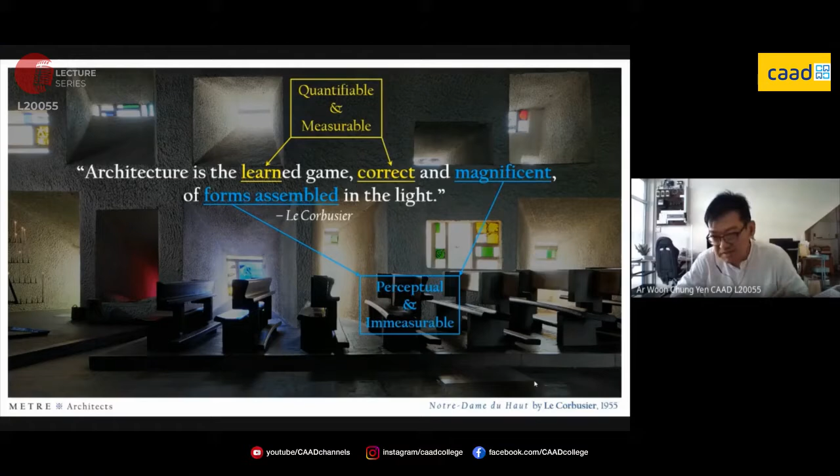I would like to talk about the perceptual in architecture. What do we mean by that? A first impression of this building would likely be that this building looks like almost 90% art and maybe only 10% science. That might be a first impression because it is so artistic, so expressive. You've not seen anything like this before.

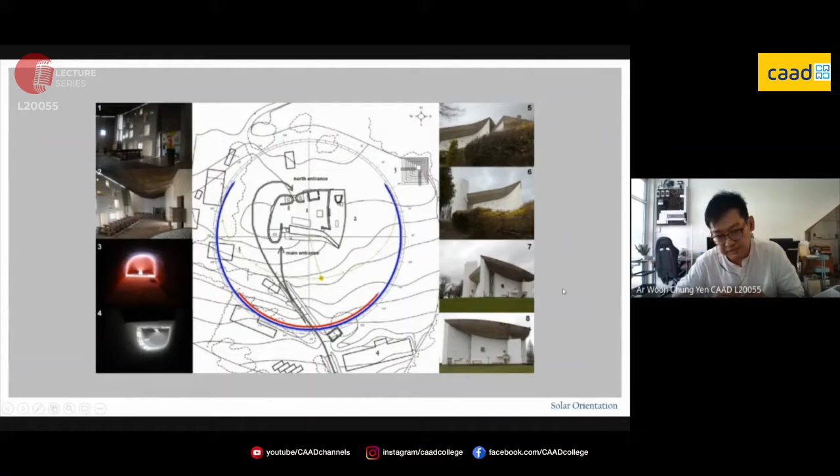But of course, Corbusier would have satisfied all that is measurable and quantifiable. For example, the solar orientation. You see the east and west facades less than that of the north and south, and this building orientates to the sun angle from the south. The roof form that we perceive to be so sculptural is actually very precise in blocking the high angle summer sun and allowing heat to enter from the low angle winter sun.

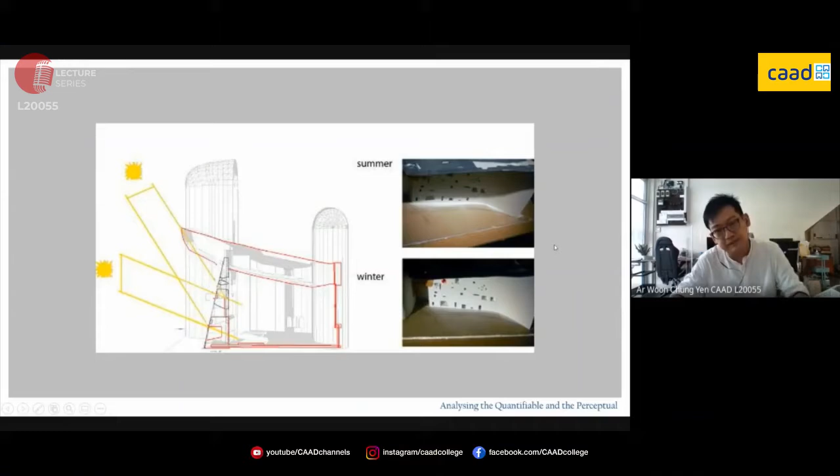For quantifiable aspects of architecture, we can analyze them like this with clarity. But how do we analyze the perceptual qualities of architecture?

I remember seeing images of this building as a first-year architecture student, and I was most intrigued by the two concave facades. To me, they are external facades that feel interior.

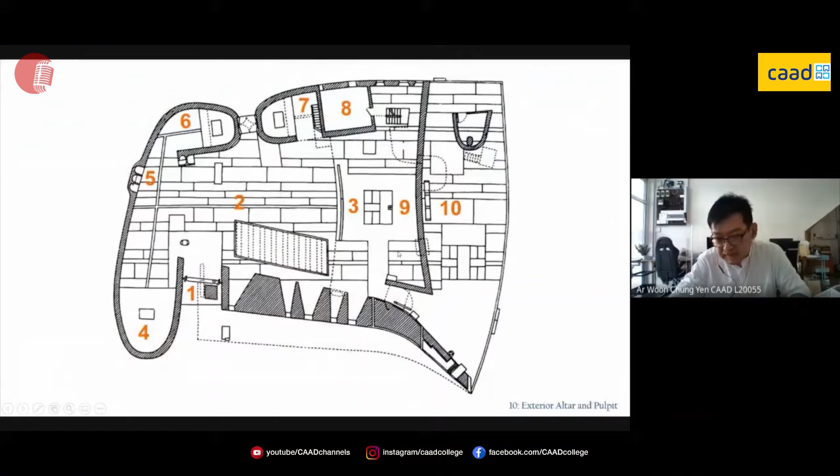The curvature on the east side is the backdrop for the exterior altar and pulpit. This curvature is also an acoustic device to project the sounds from the altar and choir onto the pilgrims gathered on the hill.

And then I realized that this exterior facade feels interior because it feels intimate. An exterior facade having the intimacy of an interior space due to its curvature, which acts like an embrace.

The difference in perception when you stand in front of a concave versus a convex wall is obvious. In front of a concave wall, you feel welcoming, you feel inviting. The curve tends to want to pull you inwards. Whereas in front of a convex wall, it feels assertive, slightly confronting, and the wall tends to push towards you.

So as a first-year architecture student, I have discovered for myself my very first perceived geometry: a concave feels intimate.

As students, we should expose ourselves to good architecture, either through images or in real life. But we should not imitate them. We should pause and think for ourselves why we like certain perceptual qualities of good architecture that we have seen, and try to extract the principles behind it.

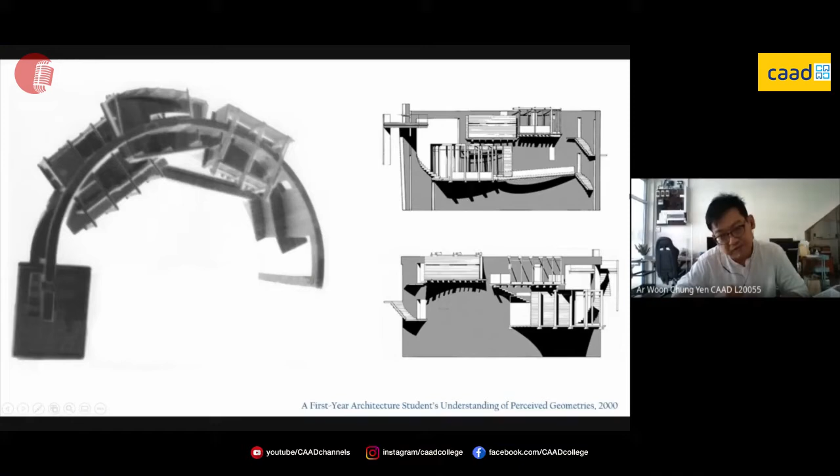Next, I would like to share 6 projects from the office, both interior and architecture, both built and yet to be built. In this very first interior that I want to show, we continue the exploration of the curved geometry.

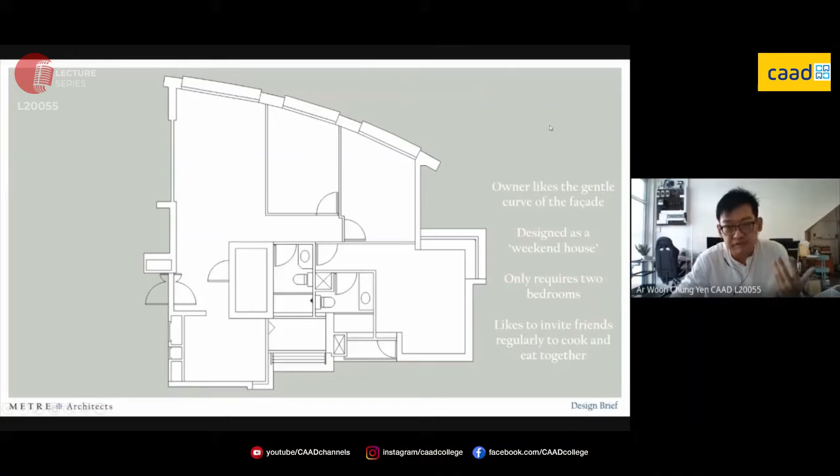This is a resale unit. The owner mentioned that she bought this unit because she likes this very gentle curve of the external facade, which is quite distinctive because apartments tend to be more rectilinear. She currently stays with her dad, so this just needs to be a so-called weekend house that only requires 2 bedrooms. So this bedroom in the front, adjacent to the living room, can be demolished to make space for a larger living area that allows her to invite friends to come and cook and have a meal together.

The first thing that we did was to demolish the bedroom beside the living area. And then we were thinking, how do we start? How do you even draw the first line of your design?

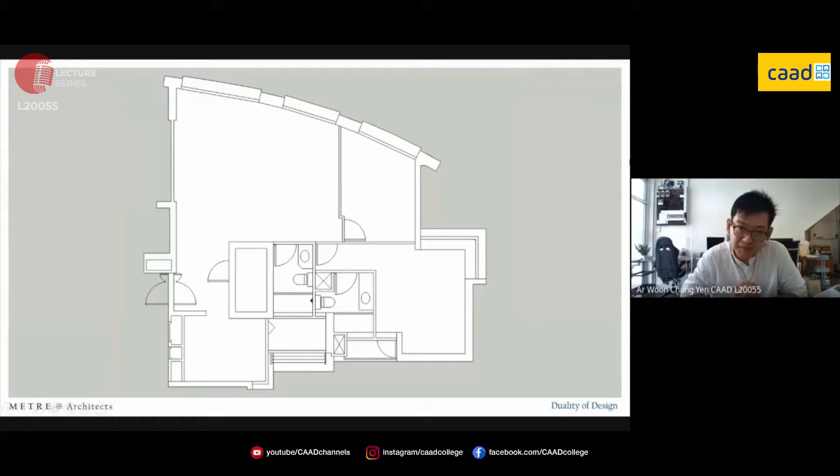So in design, there is also a duality. On one hand, you have the requirements and the preferences of the owner. On the other hand, you have your own spatial history, your own understanding of geometry. So design is actually the moment of synthesis where this duality comes together.

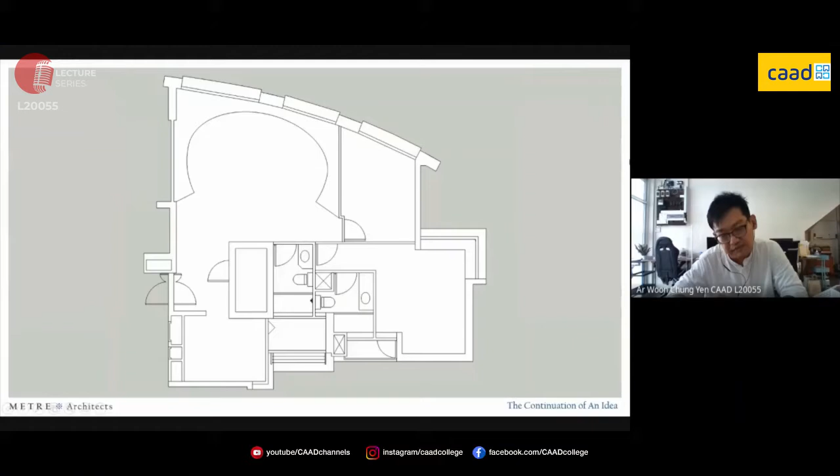You search through your spatial history and you discover one geometry able to understand the project, able to answer the project brief. And in our case, it is this curvilinear geometry, giving a sense of intimacy, as we have mentioned before, but also a very gestural gathering, and not forgetting the owner's preference for the curved geometry.

The top part of the space is made to be very airy and light with white painted color. The ground is given a very warm timber tile color. And the overall effect is that this space feels very grounded because emphasis is on the ground.

You feel the curvature of this bench around the lower parts of the body. So the moment you come into this space, you just want to sit down and relax.

We fixed the perimeter so that the central area could be very flexible. During photography, we played with the placement of furniture.

Without real people using the space, you can sense the possibility of certain pairing with certain geometry, and you see the intent or the possibility of very flexible groups of conversation during the gathering.

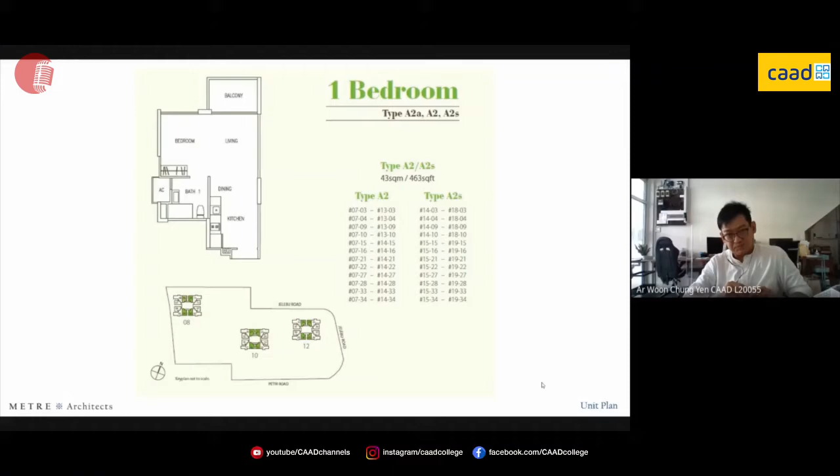The owner is a young professional, so pretty much similar brief to the earlier project. The only difference is that there is only one single space in this studio apartment. So everything has to happen within 43 square meters.

This is a new condominium. The unit already comes with certain built-in carpentry, cabinetry, built-in kitchen counter, storage, and the wardrobe.

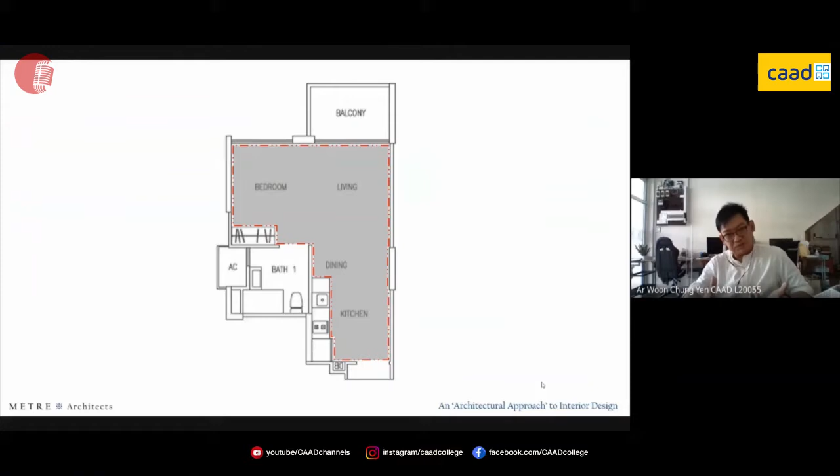As architects doing interior design, I feel that perhaps there is also a certain tendency to read the blank spaces of the interior as the project site or the project plot boundary. And your solution will be a singular building or an object within this site.

Design happens not linearly, but we try to explain design sequentially so that there's some clarity. The first intervention is the sliding glass panels here to contain the kitchen cooking smell. At the same time, we immediately create an entry vestibule so that your entry sequence could be layered. You do not step directly into the main space of the house.

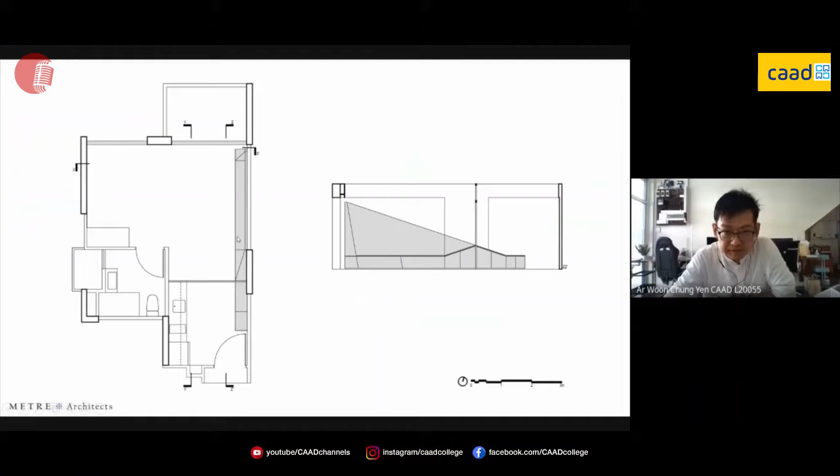On this elevation, we introduced our very first diagonal. Starting from bench height of about 450 millimeters, this is where you sit and wear your shoes. Shoe cabinet is below. From this height, we did one rising diagonal across to lead your eye to the daylight beyond the balcony. So we planted specific spatial cues for the users of the space. A diagonal is simple but very distinctive. So immediately, this space acquires a certain kind of character.

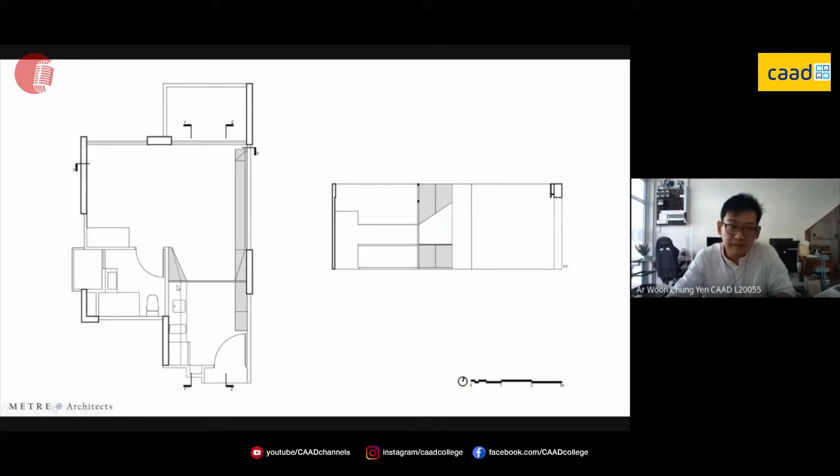Next, we introduced two more diagonals. Behind the glass sliding panel, we want to continue this kitchen counter at the back. The first diagonal is a taper because we foresee quite a lot of heavy traffic around this corner, so this diagonal makes sense more as a shortcut. The second diagonal is in the elevation of the upper story cabinetry because we want to allow more daylight to come in and land on the cooking counter. So this works as a light funnel.

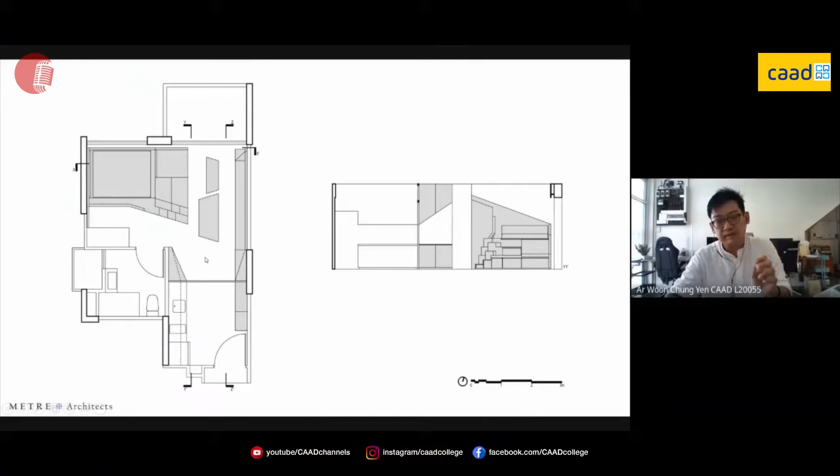In front of the built-in wardrobe, we leave the space enough for a queen-size bed, and we pinch the steps downwards slightly to better orientate the steps to the space. We like these so-called half steps very much. They were used whenever you want to save space, you want to save the overall footprint of the steps.

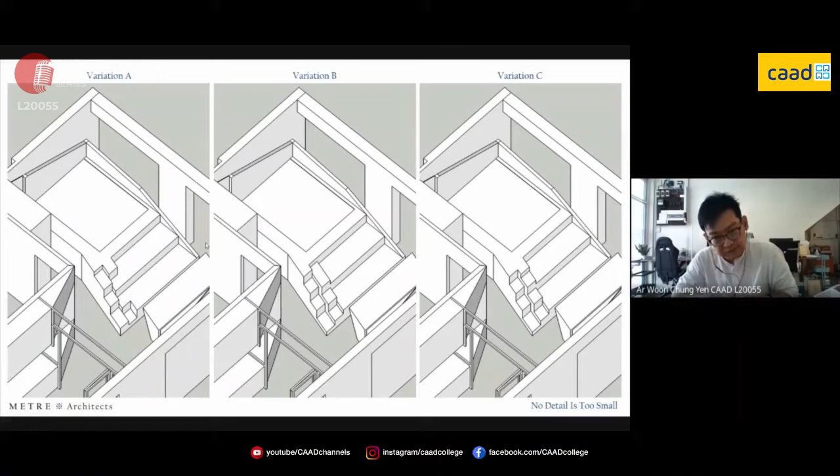Notice all the micro differences between these three options. But in design, no detail is too small. You really have to spend the effort to explore options to see for yourself which is the best geometry. We chose this geometry because it is interesting to have this winding step going up. While the steps go up vertically, this plane steps sideways from the front, and that becomes a horizontal step.

Notice in a short distance, the very light and the very dark happens together. So this is what gives the object the very sculptural quality.

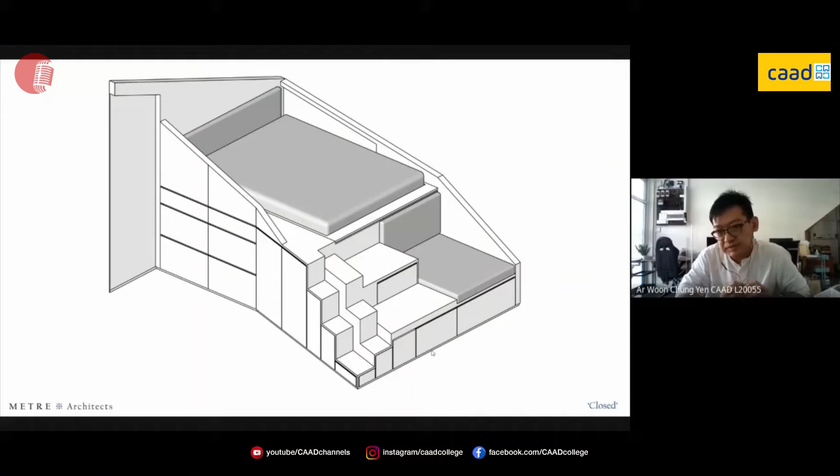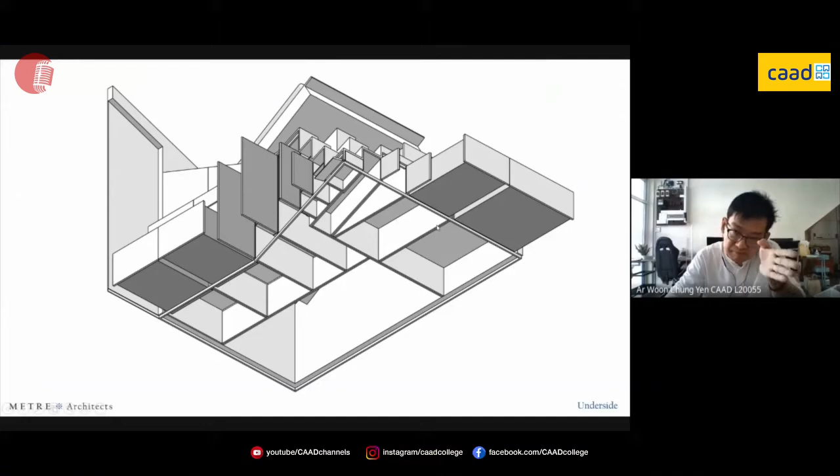We did many drawings, not for presentation, but to ensure that we communicate the drawing correctly to the contractor, because communication of design is as important as the design itself. So we literally built the entire carpentry in the virtual world, even showing the underside, how certain plywood panels, when you do them vertically, they could be like structural supports for the entire carpentry.

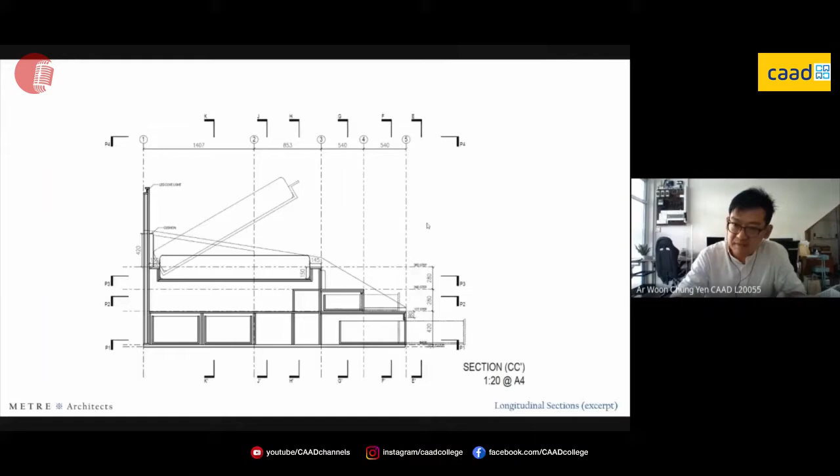We are able to get all these different angles, the key plan section and elevations, because there's so much change in the step. Basically, every new step requires a new section. So 4 sectional plans, 4 longitudinal sections, and 4 cross sections. Our efforts really paid off because the carpentry works turned out to be very accurate.

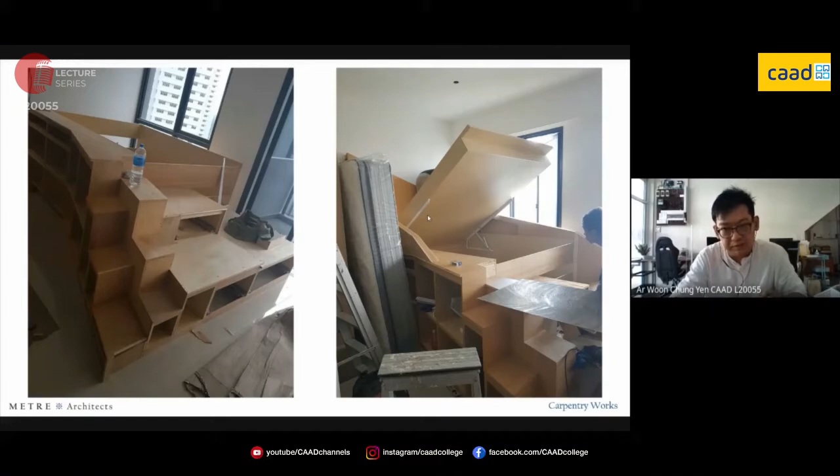We named this project Gradient Space because it is really just one diagonal. How do we perceive this diagonal? At the base, it is open. You come here to meet friends, to enjoy good company. At the top of this diagonal, the ceiling height is relatively lower, hence it feels more enclosed. You come here to relax, to rest, to be alone. So one diagonal connects two extremes of life: extroversion at the base and introversion at the top.

Not forgetting the generous volumes of storage that we have with the rise of the curve, with the rise of the gradient. We can also say that these storage volumes justify this diagonal.

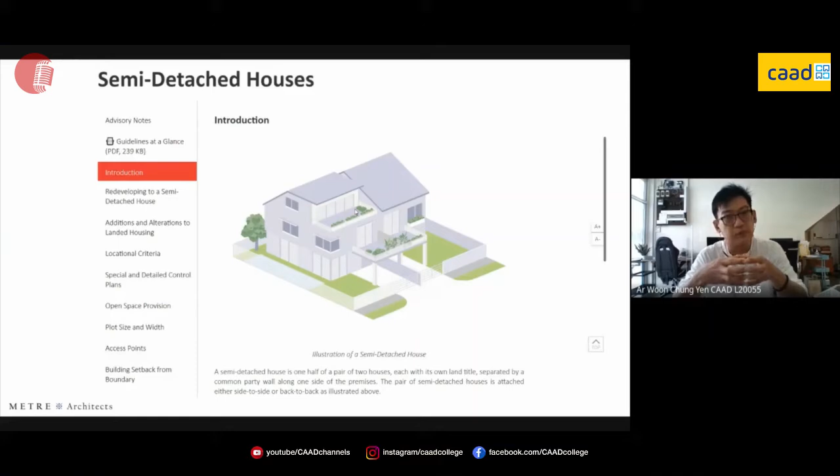Our owner's house is on the left, single story, and the neighbor had previously maximized or reconstructed the house to the maximum envelope, which is 3 stories with an attic. We shall also be reconstructing this single-story house to 3 stories, but the owner has no need for a big house because that would mean more time and effort to clean and maintain. So this is the first requirement.

The second requirement is that they are very private people. They do not like passersby on the street able to peer into their house through the gates, which apparently has happened a few times before.

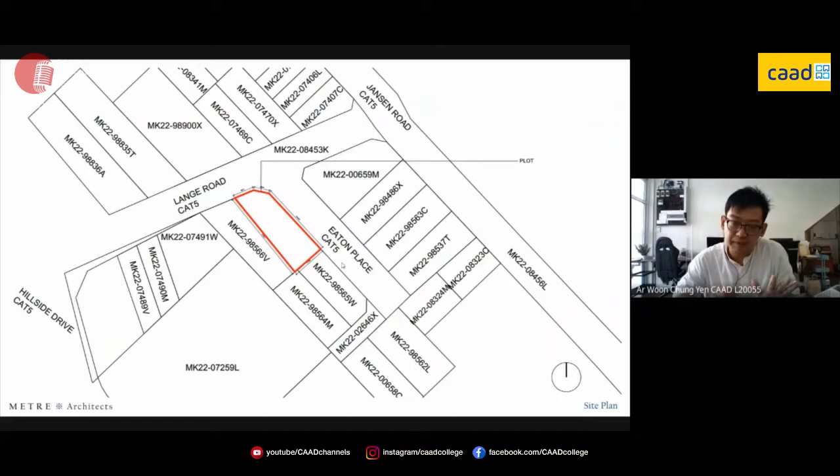The orientation of the plot is on the west side, and we are sort of shielded by the neighboring house. So we think that we just need to handle some form of minimum sun shading on the eastern facade.

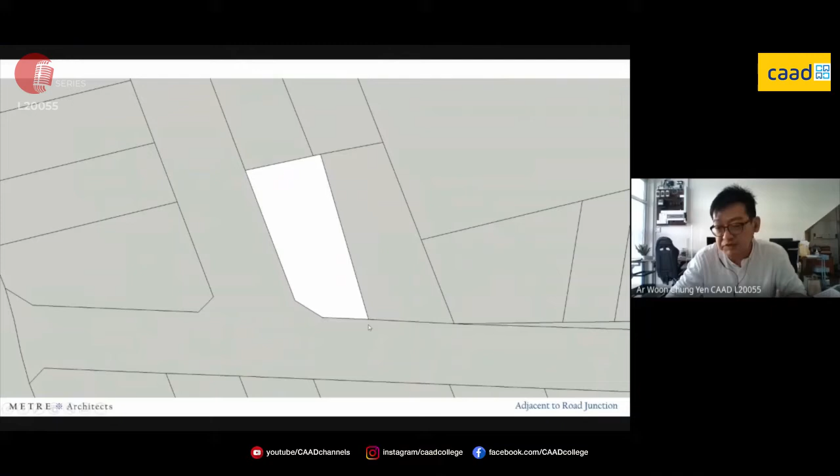If we orientate the plot to view from the T-junction, we understand why the owner wants privacy. Compared to the neighboring house, with only this frontage facing the road, our client's house has more than 50% exposed. So privacy is one key requirement for this house.

These are the setbacks, which means the house cannot be built onto the limits of the boundary. On the ground level, we maximize this setback. We have common areas of the house: the living room, the dining room, kitchen, and a guest room.

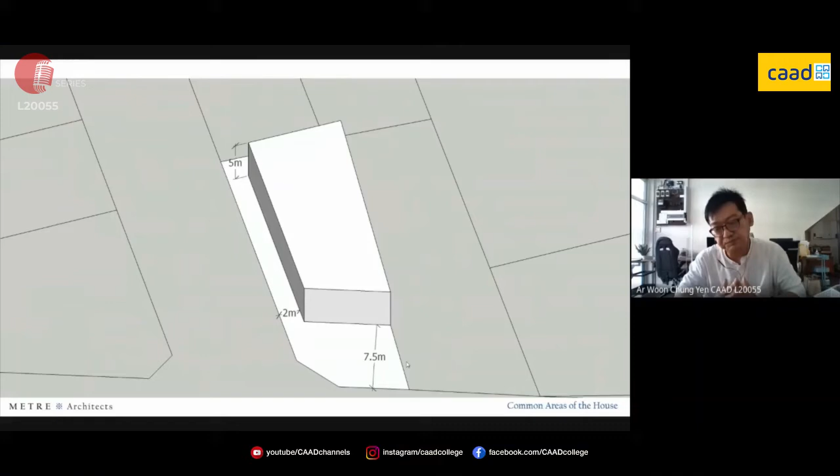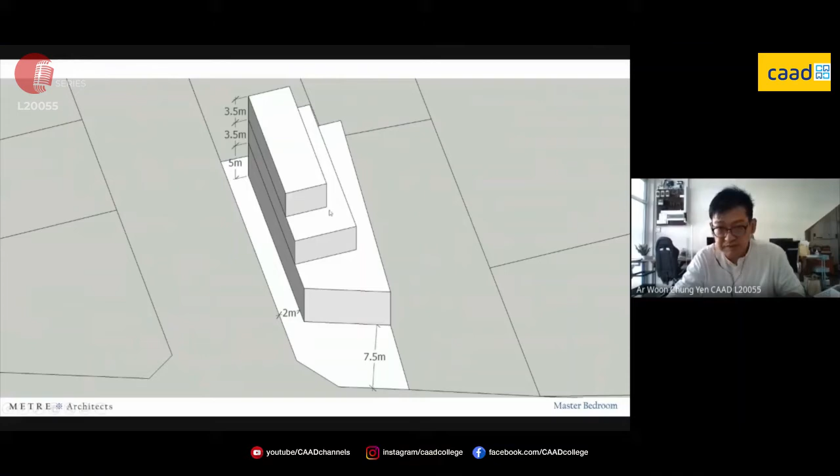On level 2, we start to pull away from the dividing wall, creating private terraces. And this area is just enough to house one bedroom each for the 3 kids. The 3rd floor is a further setback with its own terrace, just enough to have a fairly large master bedroom.

We foresee the facades that face the internal to be very porous with sliding glass panels. This is what we call an introverted house. We only want small windows on the street facade, and the porosity needed for daylight and ventilation is actually on the back.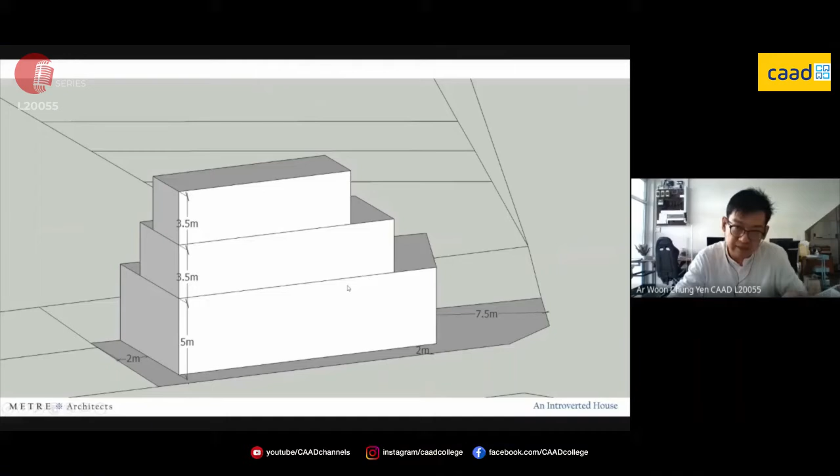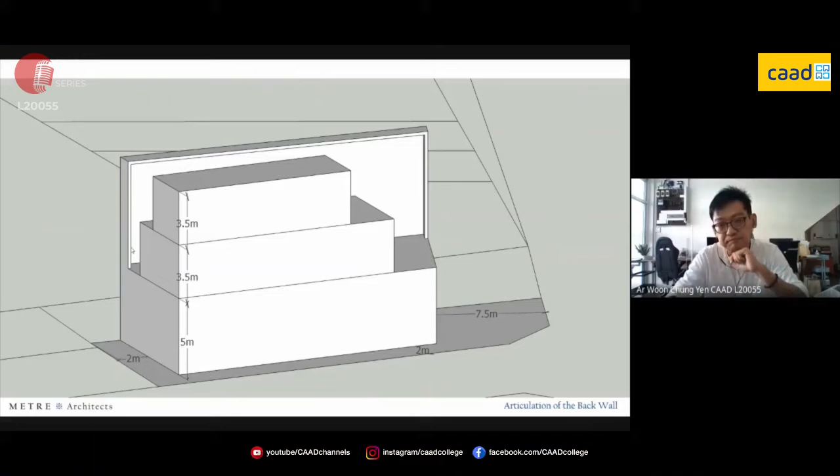We also feel the need to articulate our back wall. Notice how on 3 sides there is an extension of the fin, almost like a visor, to have more shielding and more sense of privacy for these outdoor terraces. A very simple form, but there is clarity of intent, which is private terraces that are hidden from view on the street frontage.

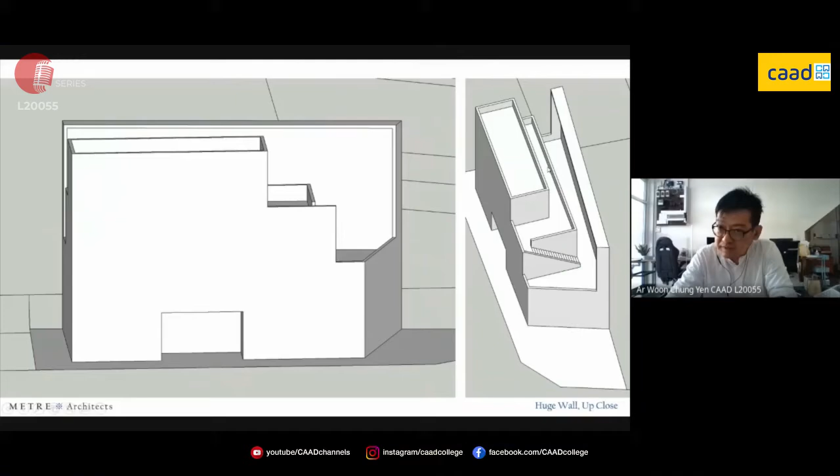This feature wall is also very important in accentuating the step profile of the house by serving as a contrast or a reference. This wall is double-story high and very close to the internal spaces, and it feels almost like looking at a painting up close, which is how Mark Rothko wants us to experience his buildings, his paintings. You are supposed to immerse yourself almost meditatively in the colors.

This feature wall is also 20 meters long, so we felt there is an opportunity to reference the sense of immensity. In nature, there is a tendency for greater concentration of lines in the middle than in the sky or on the ground. Hence our distribution of the lines follows similar logic. Not just a playful pattern, but something evocative of another experience.

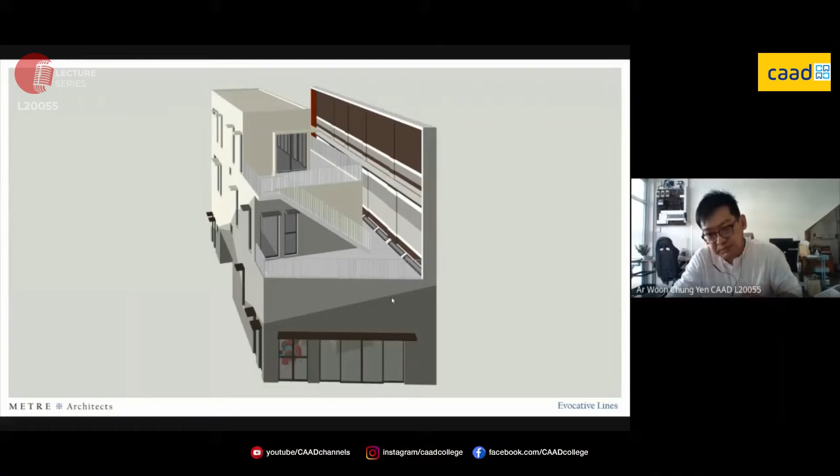We brought one line up to meet this inherent diagonal of the staircase, and we express a summit at this point, with 2 shades of cladding to relate to the stepping of the facade on the front.

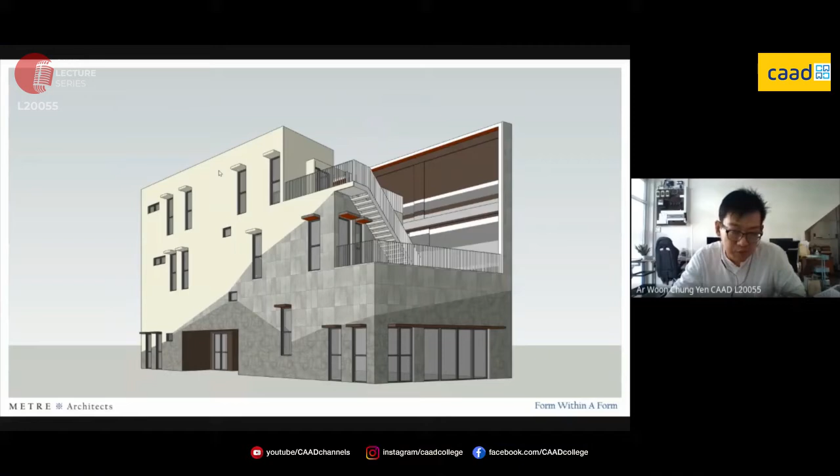Within a fairly boxy form, we have another form to break away from this boxiness, so almost like form making within the form. We know that this design has achieved intersubjectivity when the client says that it looks majestic.

These are the photos of the current state of construction. Notice this step profile in comparison to the neighbor, which is up front. Feels more private, feels more exclusive. And we can also feel the impact or the effect of this shield, making this big feature wall feel just a bit more intimate.

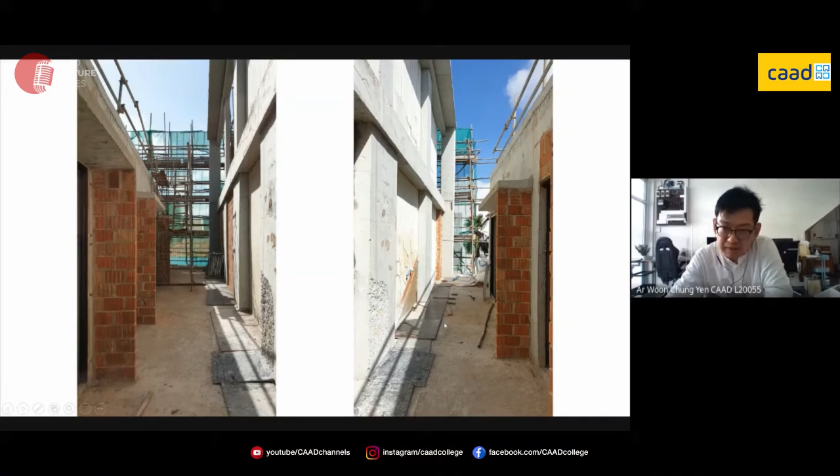This is on level 2, outside the kids' room. At certain times of the day, the entire feature wall is in the sun, and this gives another perception. You will feel as if the outdoor area gets extended to go all the way up. You feel as if the entire feature wall is part of your outdoor terrace area, so you feel a greater width of the terrace than it actually is.

This is on level 3. The moment we pull the building away from the wall, we are effectively creating what we call a here and there relationship, and the distance between them is emphasized. Again, you feel that this distance is bigger than when the same area is under an enclosure.

When the owners said that they have no need to maximize the house, they get rewarded, because these external surfaces now become receptacles of nature, and they will project light and shadow onto the interior spaces, making this experience very animated.

In this house, we explore the perceptions of distance, and hopefully before the end of the year, we get to complete this house.

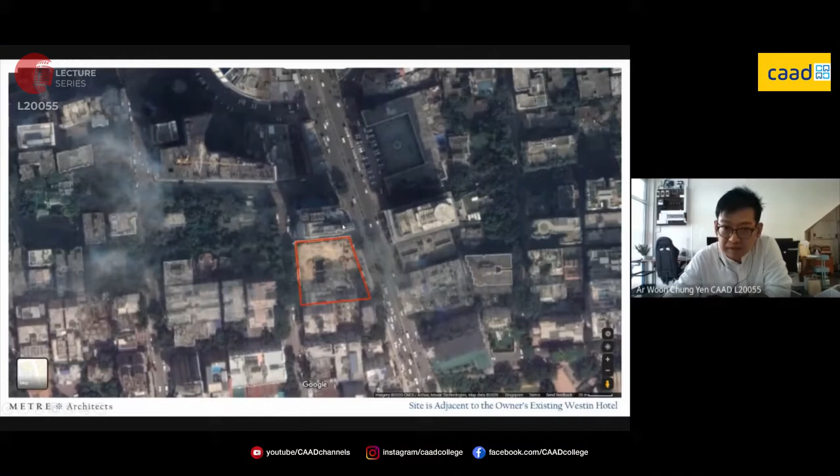For the last two projects, let's go outside Singapore. This is Gulshan area, the wealthiest neighborhood in Dhaka. The owner of the existing Westin Hotel wants to be the first in Dhaka to enter the ultra-luxury hospitality market. So on this empty plot directly to the south of Westin Hotel, he wants to build St. Regis Hotel. And of course, we are super excited to be given this opportunity to be the design architects for the project.

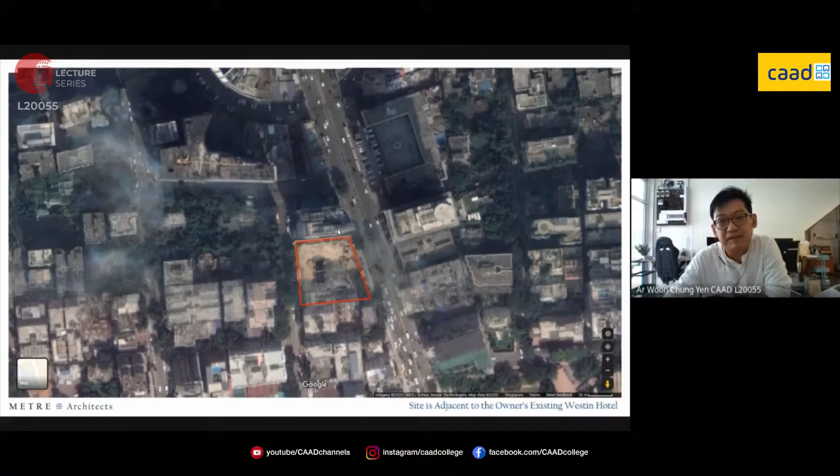If we want our design to be good, if we want our design to be received by the locals, we first have to perceive the city. I would like to show you Dhaka through my eyes as a foreigner.

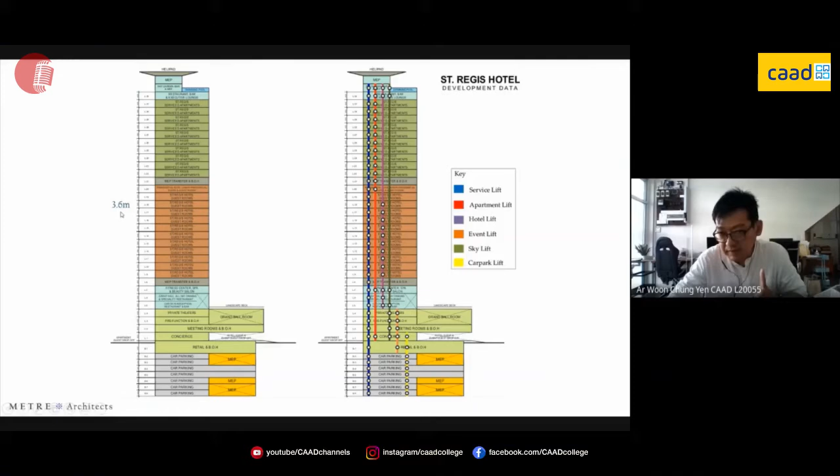Before we got appointed, the owner's in-house team, they have resources, big company, the owner's in-house team already has done the submission drawings and had gotten local approval. This is the section: common spaces at the podium, hotel in the center, and service apartments at the top. I would like you to pay attention to 3.6 meters as the floor-to-floor height. We will get back to that in a moment.

The typical hotel plan, as you can see, is already developed to a certain level of detail before we got appointed. But of course, not saying that it cannot be improved. In this plan, I would like you to pay attention to the column grid of 10.325.

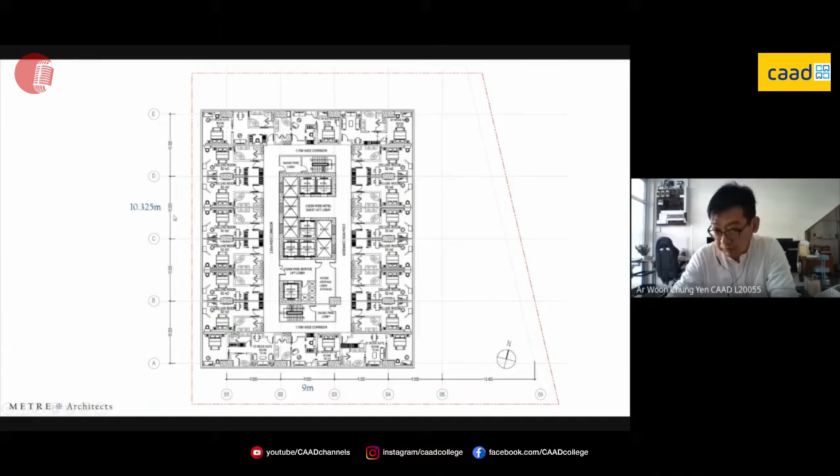Next, I want to talk about solar orientation. If your building is in nature, you could achieve the perfect solar orientation. But in an urban context, you may likely face conflicts. Existing Westin Hotel by the owner is blocking the view to the north. Buildings on the south are currently about 5 to 6 stories, but there's no guarantee - there may be a future tall development coming up if they buy over the land.

The west side is generally residential and there's lots of greenery, so that is good. And on the east, of course, we are faced with the busy Gulshan Avenue. So if you want to prioritize or maximize the view, which is what the local team did, you would have the east and west facades greater than the north and south facades, which is a direct conflict of ideal solar orientation. What this means is that we will have to have a good system of sun shading on the east and west in order to turn this into something positive.

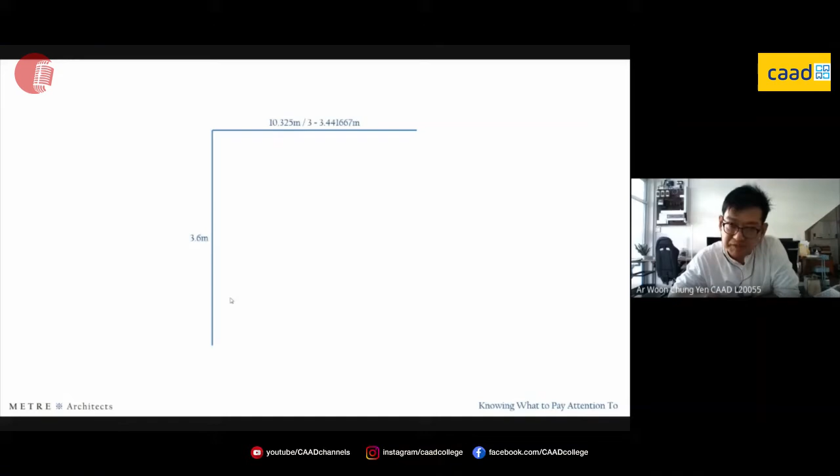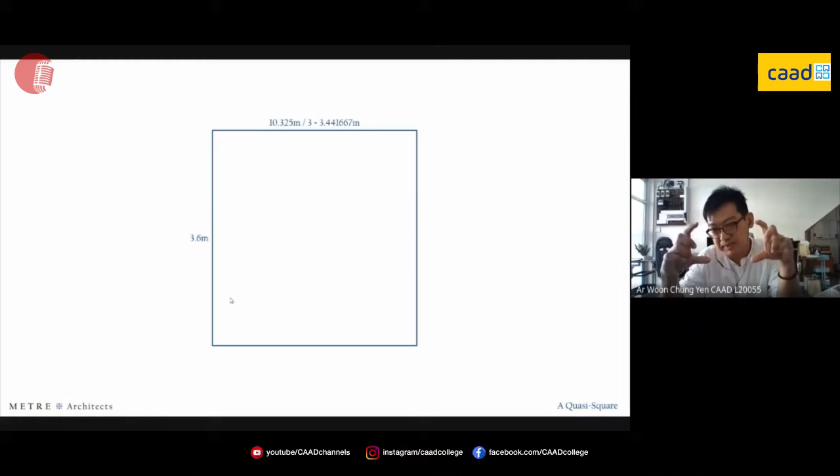Remember the 3.6 meters floor-to-floor height? We discovered that the column grid, if you divide by 3, you get something very close to 3.6 - what we call a quasi-square. Your perception may buy it, or you may perceive it as an approximated square. What this means is that now we could have a simple basic module to develop the sun shading on the east and west facades.

We have an intuition for an interplay of two simple geometries. We realize a circle may not integrate well - there may be some complex surfaces. So we did what we call a 12-sided polygon.

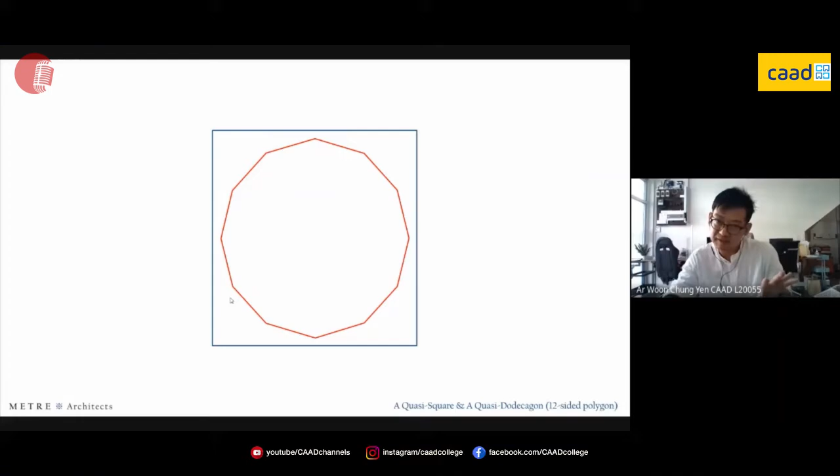Per local code, sun shading can protrude 500 mm from the facade. So imagine the blue on the building facade itself and the red 500 mm in front of the building facade. And if we join these two geometries, this is what we get.

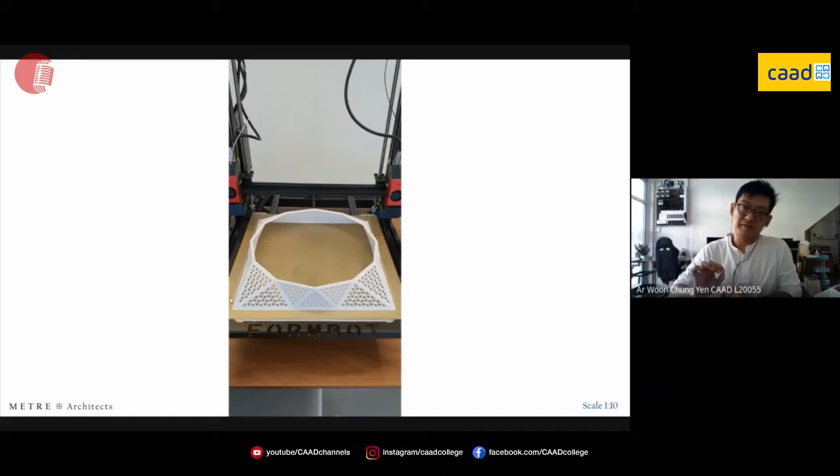At the top, the 12-sided polygon is very clearly, very pristinely expressed. At the base, we see the square. This is 1:10 scale, so the entire model is 5 cm high.

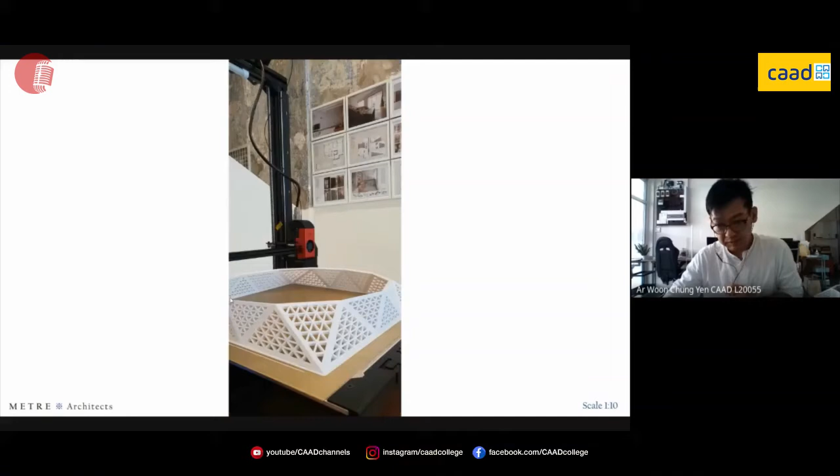Imagine the brass color plate is the building facade. Your sun shading is actually coming up by 500 mm away from the facade. So we are quite pleased with this result. We go back to the drawing board and say, now we need to repeat this module.

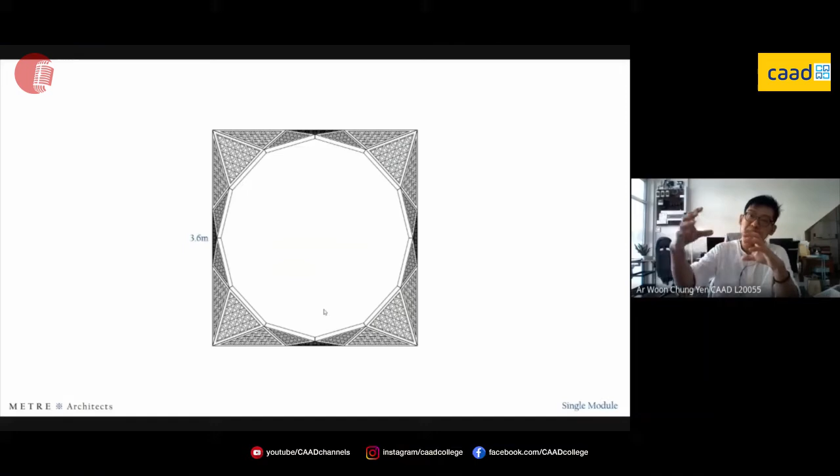A single module is 3.6. With 4 modules at 7.2, you start to see an intricate flower pattern in the middle. At 9 modules, you feel as if this is a very delicate lattice grid. We also immediately tested this 9 module version at 1:30 scale.

We want to see the impact of daylight on its undulating facade. We hold it up to the sky. We imagine this in full scale, and don't forget to frame a view through this.

The basic design idea is that the sun shading shall not be merely horizontal or vertical, never utilitarian, but in a circular shape, again like a visual funnel, to try to enhance the framed view when you look out from the hotel room.

And then we have an overall uniform grid. We did what we call a subtraction exercise. So we start with this uniform grid.

If we delete the parts in red, we get this geometry. The ends are tapered, very slender, and this could become one way to express the limits of this grid.

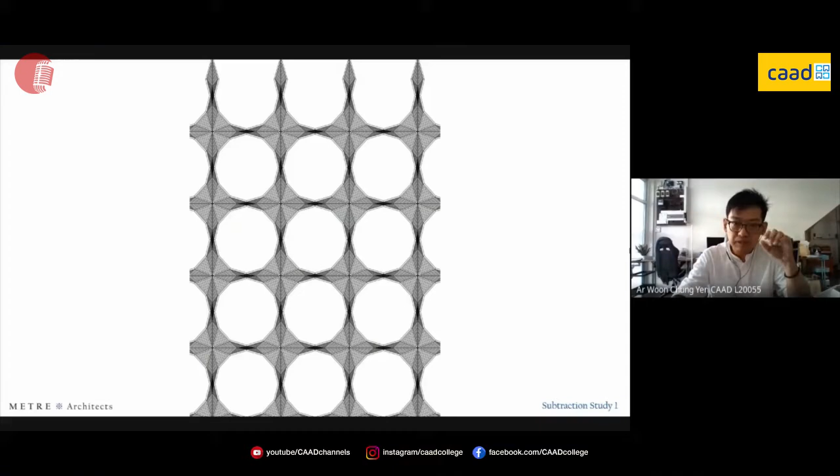We did many such subtraction exercises. I would just like to show you one more, starting from a uniform grid. If we delete the parts in red, we get this: a continued discontinuity. Even if we discontinue this part, you will still feel that this lattice runs through.

Notice how we started with a square. Now we have another square appearing, just rotated 45 degrees. So just by subtraction, we are able to achieve some very intricate patterns. We know we are getting onto something.

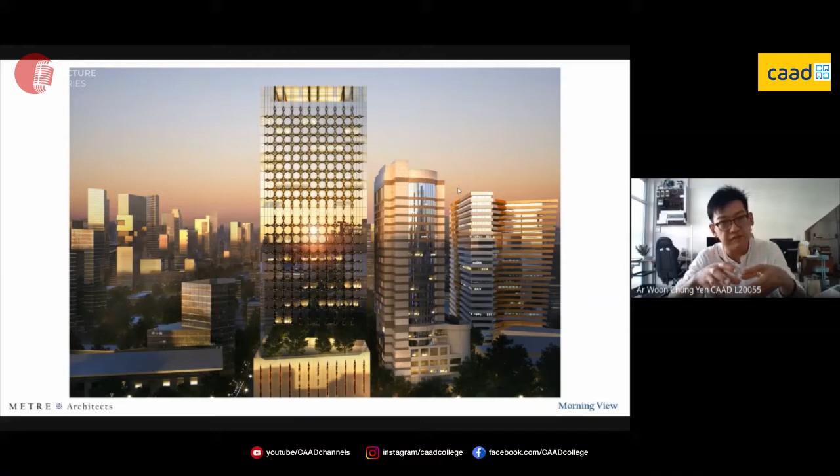Remember the building footprint is quite squarish. That would actually generate a building form that feels very heavy. Instead of making it look heavy, we try to make it strong by giving it a certain monumental sense, which we felt is befitting a development of this prestige.

The shimmering colors from the intricate sun shading give a certain sense of craftsmanship, a certain sense of luxury that we feel befits the branding of a St. Regis hotel. The owner and in-house team are very much convinced of this, but we want to do more.

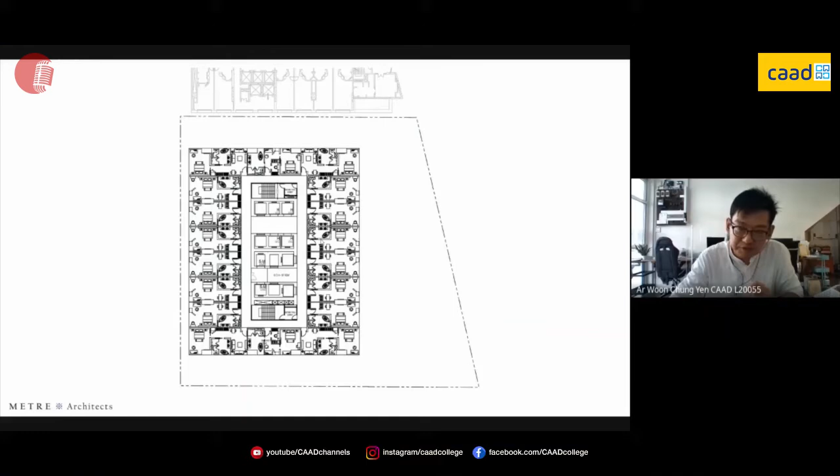So this was just the east and west facades. We went back to the drawing board. We felt that St. Regis should never be about maximizing the floor plate. So on the prominent south elevation, we propose on the even floors a triple bay suite room.

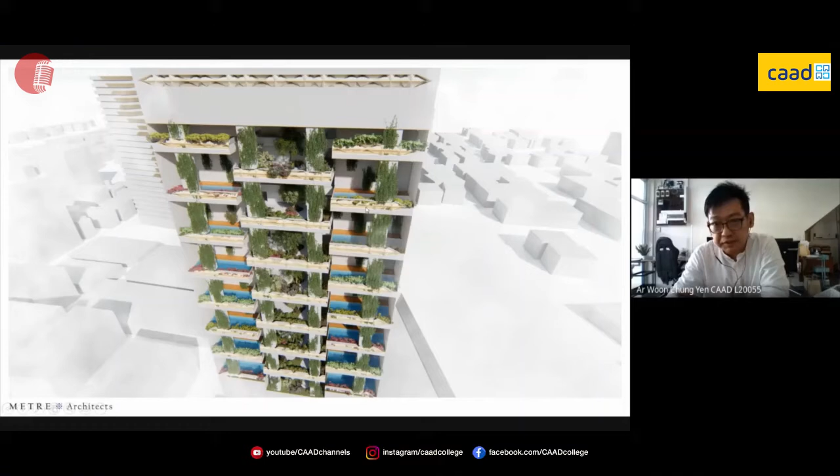These could be open or indoor pools. On the odd floors, we propose a garden. Each pool or garden is now double volume so that the facade is opened up and the luxury from within is revealed.

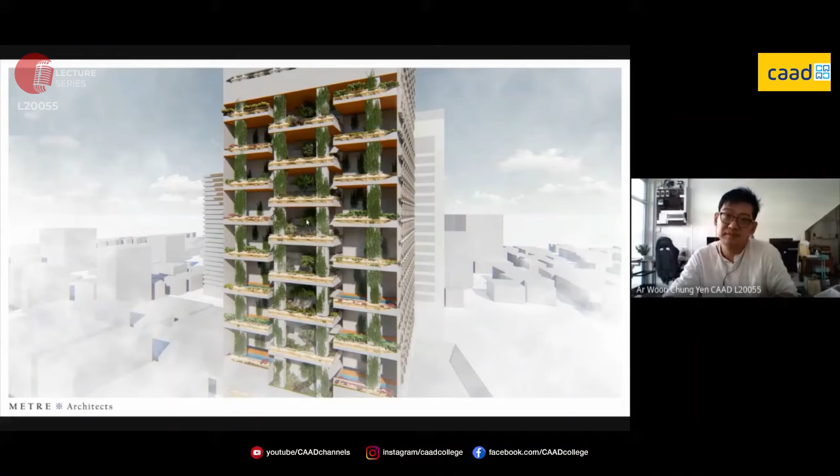From busy Gulshan Avenue, you look up and you'll be attracted by an open facade. And yet you realize that this luxury is lifted off the ground, exuding a certain sense of exclusivity.

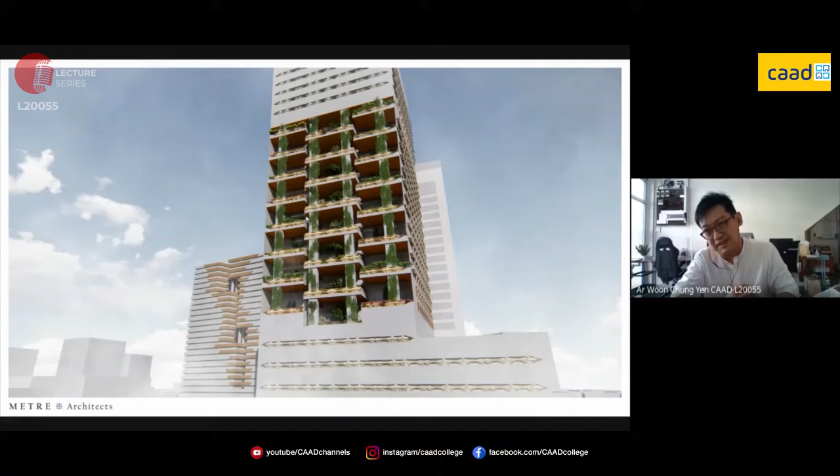The owner likes this very much. We are currently developing this design further.

Now we come to the final project, which is actually a competition. This is an invited competition for a corporate headquarters. We were very much honored to be invited by one of the best architectural firms in Dhaka to collaborate with them as one of the 3 invited teams.

Gulshan is the wealthiest neighborhood in Dhaka. Tejgaon is the up-and-coming neighborhood in Dhaka.

The site faces a prominent ring road. The plot is open on 3 sides. So we know immediately that form making for this project shall be very important. And the design ideas have to be good and relevant if we want to win this competition.

We believe ideas have to be grounded in the context, so I would like to share some of my further observations of Dhaka. The first thing that hits me is actually the vibrancy, perhaps due to its large population.

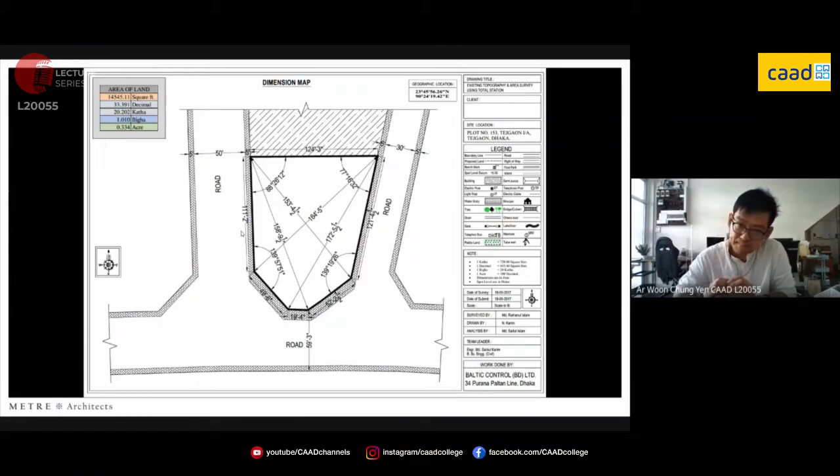Hence, we like to incorporate such observations or such ideas into the project, and we wonder, how could we do so?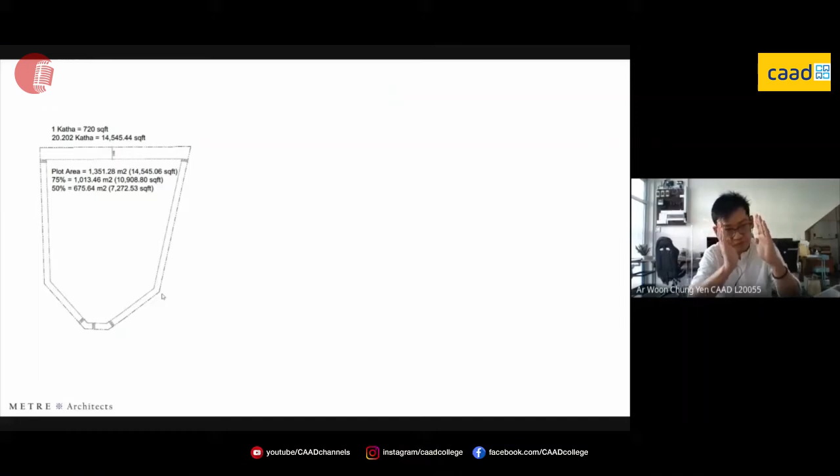Setback from the common boundary is 3 meters, from the road is 1.5 meters. This plot feels like a twisted geometry that is pushed or skewed sideways. So the first intuition was, can we return symmetry to this plot?

This is the podium site coverage of 64% out of the maximum allowed coverage of 75%. And the tower could be like this, 47% coverage out of the maximum allowable of 50% for the tower. We are slightly short on site coverage, but the total floor area proposed is still greater than 100,000 square feet, which is the requirement stated in the brief.

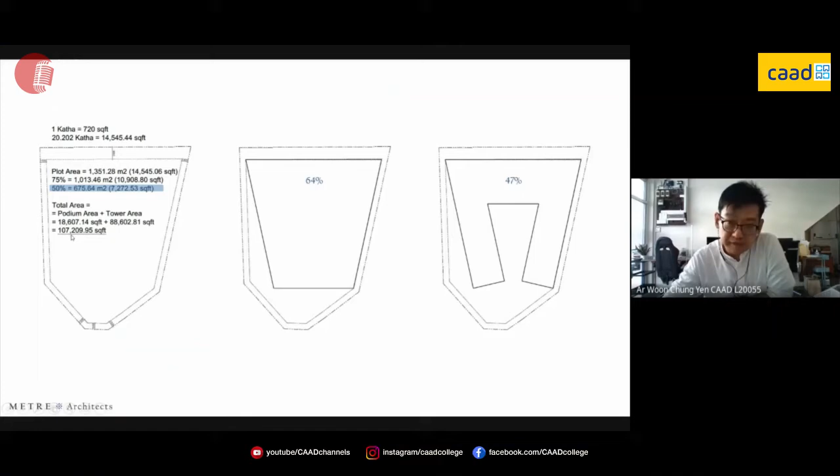This is, up to this point, just an intuitive form, an intuitive floor plate. We know there's symmetry, there's axis, but we're not sure whether it will work. So very quickly, again, we have to print it out to examine this form.

A vertical corridor in the middle and steps on the inside to the scale of the company. And because we express the podium geometry or the podium area within the form, this building has the same footprint extruded upwards.

We have another intuition for the expression of this detail. The same facade, the same plane coming down, going across the height of one step and up here again as one single plane. So immediately we know we have to print at a bigger scale, twice the scale, just the front, so that we can print quickly, because in competition you really don't have a lot of time.

Our intention: the same plane coming down across the height of one step, going up. It feels like a succession of U shapes stepping outwards. The top portion feels like it is a gateway to something beyond. The bottom portion feels like a door of a bank vault that is very secure, very protected.

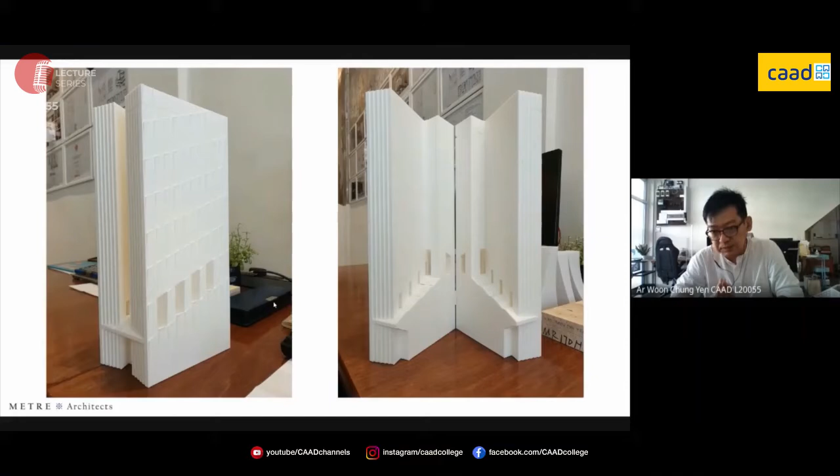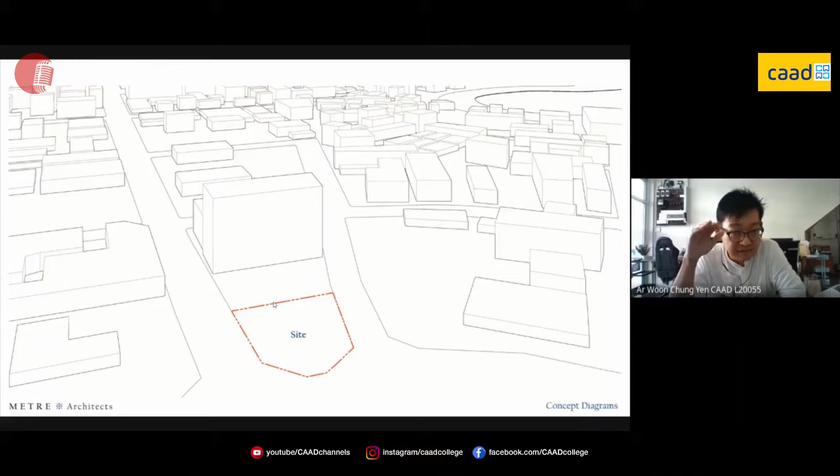So how do you know whether your intuition is correct or not? Your intuition is correct if the more you think about it, the more it makes sense. And the correct intuition is one form satisfying several or multiple intentions.

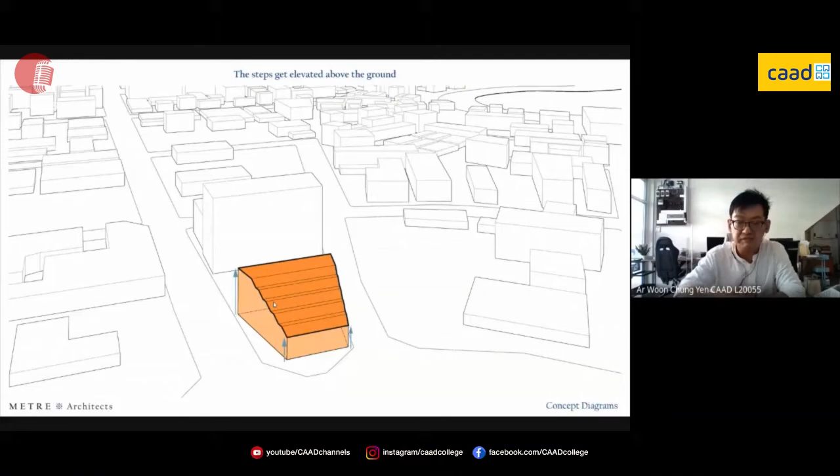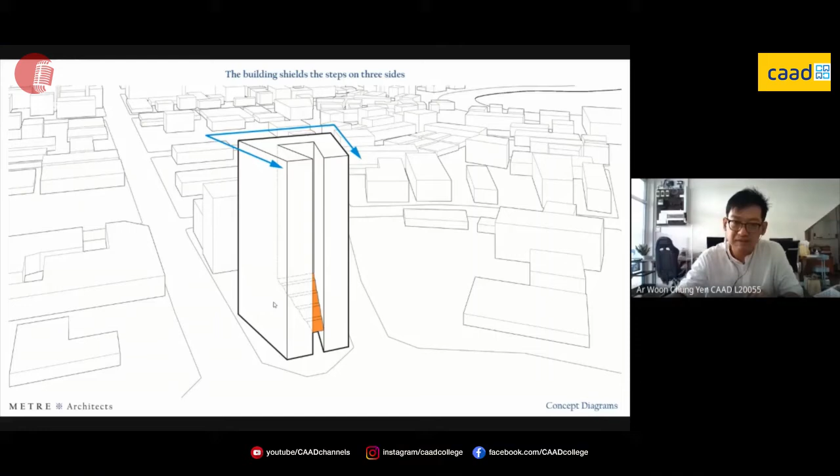On the blank slate, we envision a public plaza that is raised as open steps, but elevated off the ground to respond to not the scale of a nation, but the scale of the company. Building form on three sides, enclosing and protecting these steps, leaving a gap or opening in the middle to view out, and allowing the city to view inwards.

And this is the development of the idea of an opening that we have first tested on the interior scale. The moment you have an opening, you will be more conscious of the other side.

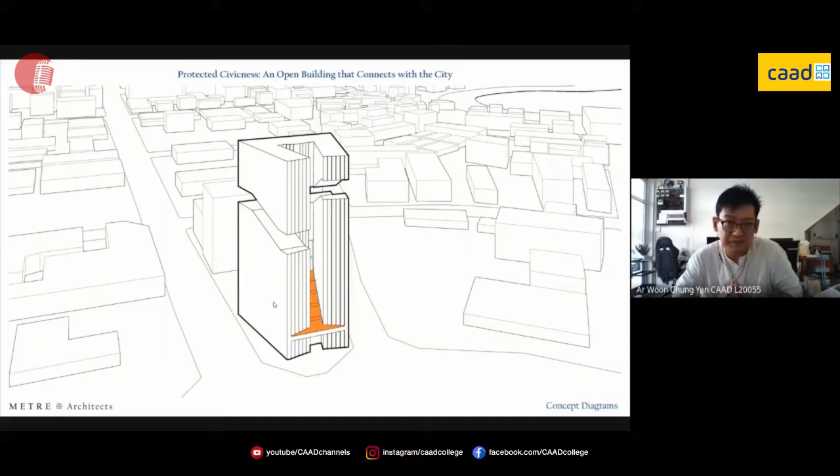When we say that a building connects with the city, it is entirely true because it is entirely perceivable. Sectional perspective: we have the auditorium that is part of the brief, expressed as steps, and on the floor below, we have an open communal floor.

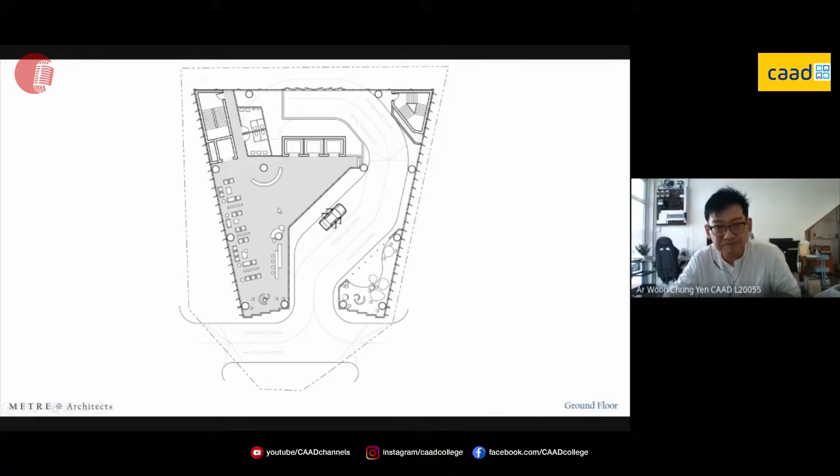On the ground level, the vehicular entry is actually right through the middle, very ceremonial, very articulated. Landscaping, a nice reception. Basement parking with 2 loading and unloading bays. Podium floor, we have the meeting rooms overlooking the high space at the entry foyer that is below the steps.

Typical tower floor, we want to show that we can have open workstations arranged either horizontally, perpendicular to the facade, team leaders at the front, or private offices in the middle, even an entire wing of senior management and a meeting room.

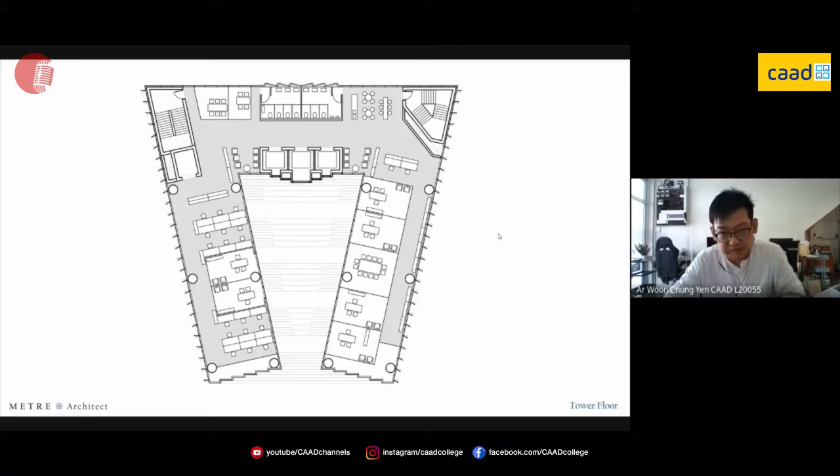The brief for all competitions will generally be very generic, so it is very important to show that the architecture you propose is able to accommodate all sorts of internal layouts.

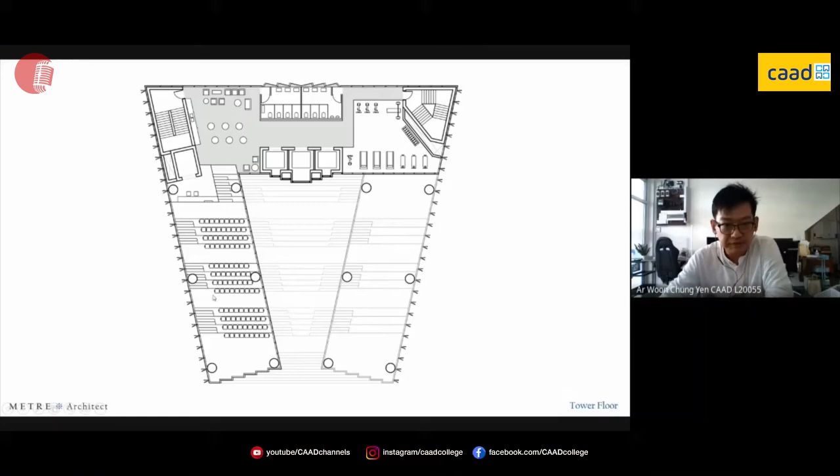The auditorium floor with the gymnasium. Notice a deliberate detail for the sun shading. On the facade, it is a single line, and you tilt either to the left or the right, which is shown here. On the same line, the sun shading fin tilts either to the left or to the right.

We imagine the building beside the city, and the sense of transparency is not only important as a metaphor for the company's philosophy, it is also entirely perceptual.

It is very important to convince the owners that this is the right imagery. This is representative of the concepts or ideas that they want to project to the rest of the city.